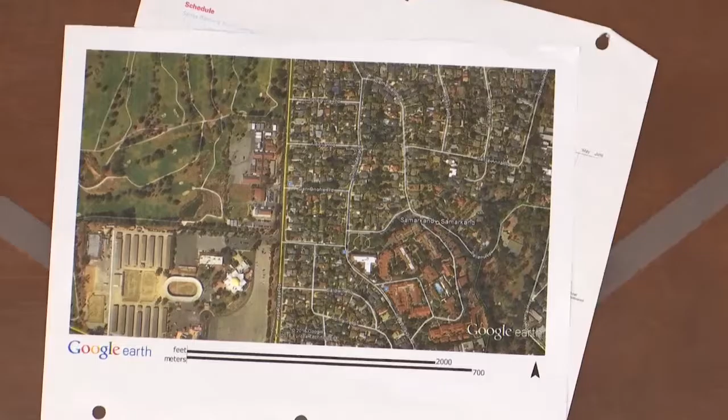A lot of them are just on dirt now. We've had a drought. But they're all parking within the setback, and they're up high. So the question becomes, what is going to be the tools in our toolkit if we're given the job to determine whether or not those folks will be allowed to park in their front yard, and how do we as a board have to deal with that? So that's maybe more of a process question.

Again, the issue with hedge height. The current hedge ordinance, as I understand it, if hedges want to be taller than 12 feet, remember they can go to 8 feet and they can get a 4-foot increase to the hedge from staff over the counter. But if they want to go higher than that, then there's another process that has to go through.

And the current ordinance, the way I understand it, the community development director had to make the call on that. The new NZO, the way I was reading the memo, seems to appear that that's going to come to us to make that decision. So one of my process questions is, does that start automatically a consent calendar? There's apparently something about public noticing. So we're just not quite sure how that all will work.

The accessory buildings, and this is some questions, again, of how it's really going to work. The new NZO says basically we're going to take what used to be allowed as a garage and an accessory building, we're going to combine those into the square footage, and now it can go up to 1,000 square feet on acre lots or larger. Some of us, I think, may have concern about that move, but again, we're not quite sure what that all means.

This chart that you're showing right now, that's just existing, and the bottom line is what you're proposing. Correct. Everything above the bottom line is just what's existing right now. Oh, well, no, not exactly. Sorry, that's what I'm mixing up. The part that's existing right now is these 6 boxes here. I don't think there's a way for me to draw a box around it, but...

Moving forward at 1 acre, it changes after the 1 acre designation. You can see these two underlines, that changes, but this part's the same. So the garages in the 1 and 3 acre, and the existing building in the 1 and 3 acre, are going up. Yeah, 'cause the whole total is gonna climb to 1,750 square feet - from 1,250 to 1,750 if you're more than 3 acres, from 1,250 to 1,500 if you're between 1 and 3 acres. So the garages and the accessory buildings will change.

Yeah, your mic might not be on. I don't know, maybe it's on mute. It's on now, okay, I can hear it.

So the garages and the accessory buildings will go up in the greater than 1 acre or greater than 3 acres. Correct, to 1,500 and 1,750 respectively. That's what's proposed, yes, and this was in response to a request from the public.

Can I ask one question, going back to the garage and livable space? So now the client has the opportunity to make that 1,000 square foot all garage if he wants to, correct? But he does have the option to have a maximum of 500 square feet of livable space and the rest garage, or he can make it all garage.

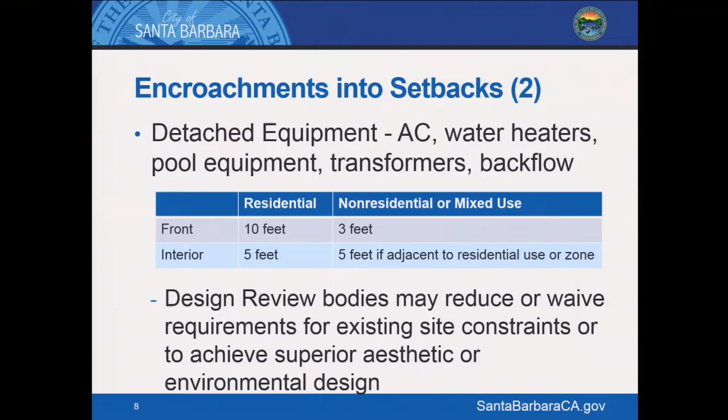So if the water heater was at least 5 feet away, it'd be allowed by right. But let's say for some reason the water heater itself would be 5 feet, but to put an enclosure around it would be 4 feet 6 inches away. But the design board wanted that because that's a superior aesthetic solution, then they could say okay, it could be 4 feet 6. But do we have the authority or decision-making process to say we don't want the water heater there, we want you to put it elsewhere?

Aesthetically, probably yes, from an aesthetic standpoint and neighborhood compatibility. We would expect that the design boards would use the good neighbor guidelines, and a water heater may not be the best thing to be right opposite a bedroom window. So then you could say we think this water heater should be put in a different spot along this wall. Okay, so that's a finding we'd have to be fairly definitive about—we're asking you not to put it there, asking you to put it somewhere else, and the reason is X, Y, and Z. Correct. Compatibility, neighborhood, good neighbor guidelines.

Next one, electric vehicle supply equipment. The city's trying to encourage electric vehicles. They need charging stations. Right now, a charging station that happens to be in a front setback needs a modification. We're saying that the new ordinance would allow these charging stations to be any place a parking lot's allowed, a legal parking space is allowed, but at least 10 feet from a front lot line, and that the design boards could let it be even closer if they wanted to.

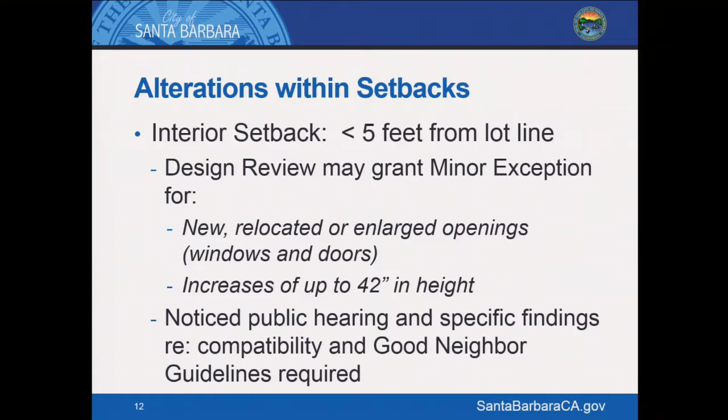I think that's where there would be a... we haven't thought through who looks at it yet. One of the things about this, we see it quite often, frustrated applicants asking why can't I put a door or window, and why do I have to go get a modification. So I think in that respect this starts to address a lot of that stuff we see, where we look at it and go, it looks just fine, we don't know why you have to get a modification.

So I think this is probably a huge help, particularly on those properties on the Mesa that were all built as tract houses in the 1960s, and then got overlaid with zoning changes that made every corner of their house non-compliant. So I think this is kind of a plus. And again, the findings are compatibility and good neighbor guidelines, the ones that say windows shouldn't face each other, that kind of thing.

Fences and hedges — so not in the too distant past, about 4 years or so, the city changed the fence and hedge height requirements. Basically, the council gave staff the authority to grant minor zoning exceptions allowing an additional 4 feet over what's allowed. So on interior fences and hedges, the requirement is 8-foot max, and with the minor zoning exception you can go up to 12 feet.

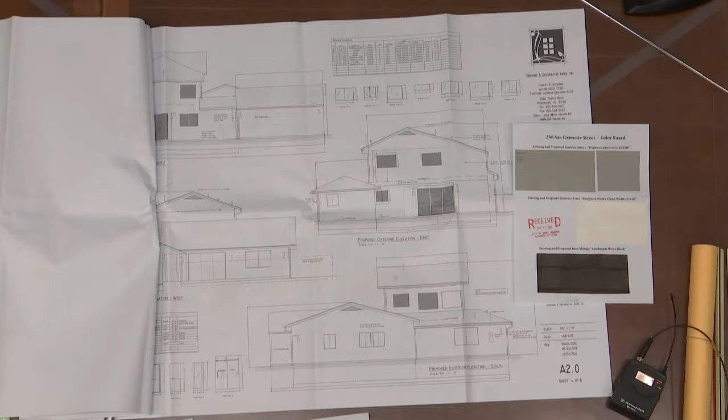Provide a photograph of the proposed roofing materials. That's also included on the color board. It's also the same as the existing roof.

The cut sheet for the light fixture you should have as well. There's only one exterior light, is that on the fixture drawings? It's on the last separate page. Oh, it is? Okay. Yeah, it is right here. Okay.

Provide an electrical plan, including exterior fixtures, and that should be somewhere on here. I'm not sure exactly where. It's shown on the elevations, which is primarily what we want to look at, okay?

And provide a roof plan, including the gutters and downspouts as well, which were all added. And then there were also architectural details. I don't know if that was on here, but eaves details are also on the last page. Okay, asked to include, and that's these. Okay, anything else?

The only other minor change we made that I feel I should point out is that the door out the back from the laundry room was changed from a door to a window. Okay, and that's on the first floor in the back of the house. Okay, anything else? That should be it.

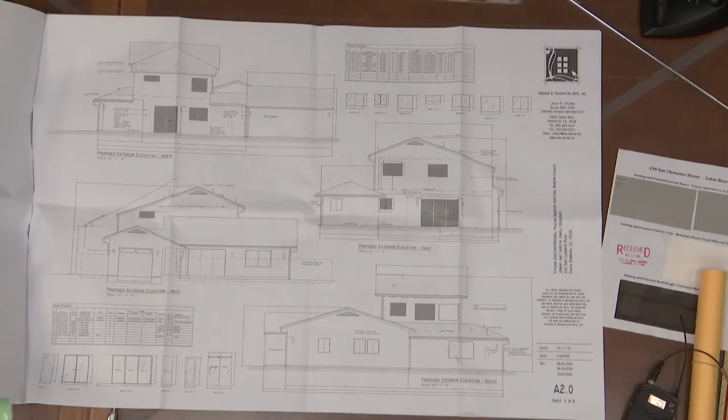Good. All right, before we go to questions from the board, do we have any public comment, any written comment, Katie? No, Mr. Chair. Anyone in the audience wishing to address this project? Seeing no one come forward, the chair will close public comment and bring it back to the board for questions.

The applicant's here for final approval. I have no questions, Mr. Chair. No questions. Anyone have comments? I think they did due diligence. I can support the project. Any other comments?

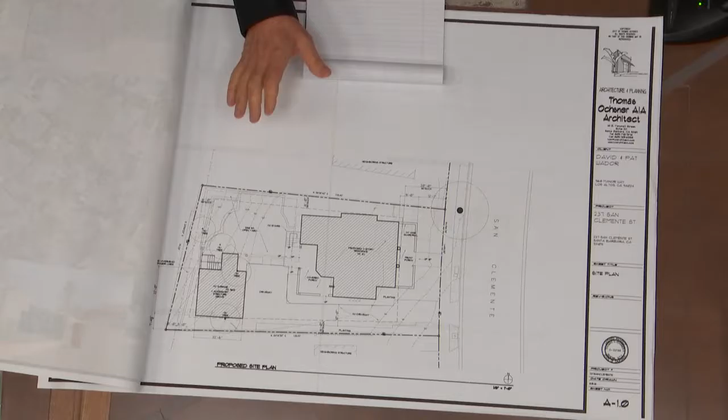...the required impervious material that would trigger Tier 3. So we're actually a Tier 2. Chuck can speak more to that.

In terms of the front porch, it has been brought in and the house has been brought a little bit back from the front. In addition, the porch has been dropped and the guardrail around it is only 2 feet high. I know this may fall into the category of what the discussion was about the front porch, but this is a complying porch - it sits low enough and doesn't have encroachments that would qualify it as a structure.

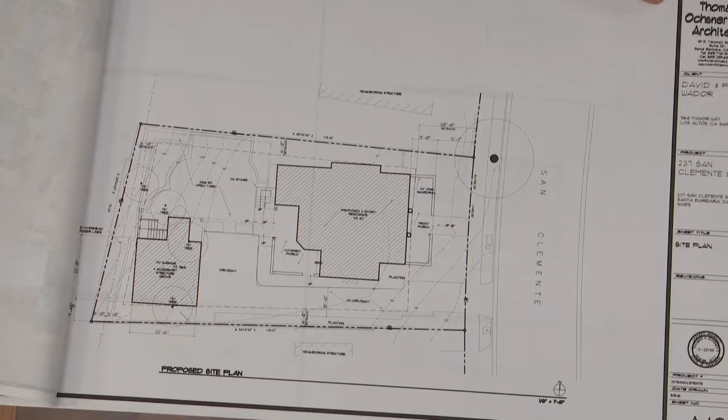In terms of grading, we've got some grading that will go over here in the rear. The rear spiral staircase has been turned into a conventional stairway. We can go over that in the elevations.

I did drop the accessory structure down slightly. I think the largest changes were, let's go to the upstairs. We reduced the second story deck, brought it in from the south so that it's more of a size that really conforms with the master. Again, we've got conventional stairs on the back of the house.

The square footage, we went and double-checked the FARs and the numbers. That's really a staff thing, and the FARs do add up to 85%. I'm happy to go over whatever misunderstanding there might be. Did that include the accessory structure? Yes, it does. So this is one of those accessory structures that combined is less than 1,000. The garage is 500, and the second story is much smaller than 500. That square footage went into the main house to get to the 85%.

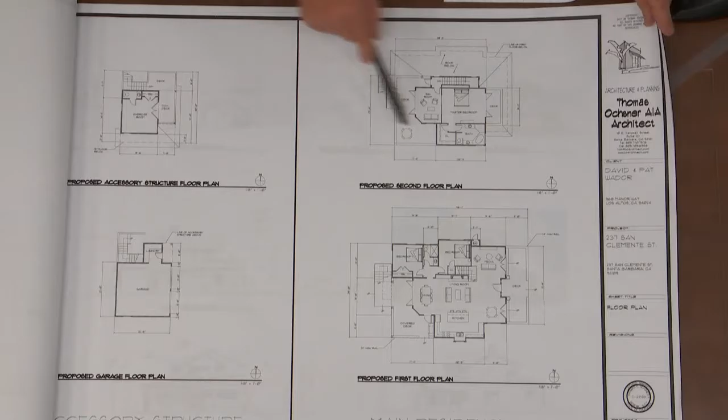So the second story was redesigned significantly on the accessory structure as well as the roof line over the master. And I've got the old elevations so we can compare them. It might be a little clearer.

But if we start with the front elevation, we brought the balcony in. It used to run all the way out to here. It's been brought in, and this hip's been introduced to create a little bit more symmetry. I think there was a comment about the size of the porch, the symmetry, and maybe how far the first floor porch was encroaching forward. But I think the board consolidated their comments to really reducing the second floor.

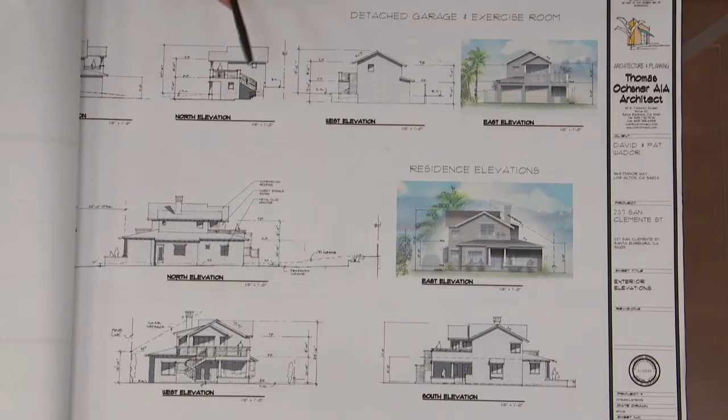The height of the structure went down slightly because of the redesign of the roof and because I set the building down lower and I set the accessory structure down lower, mainly to achieve both the reduction of height comment, but also to achieve a porch and finished floor that could flow out and still not be in violation of what is considered to be a structure out in the front yard. If you step up higher than 10 inches, it doesn't qualify as a patio in the front yard setback.

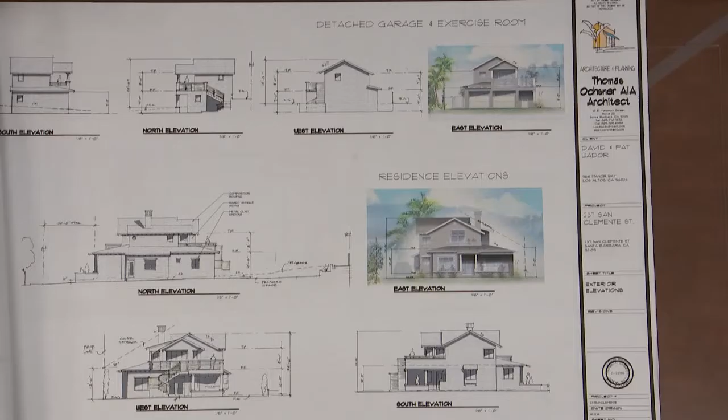So, let's see, there we go. In terms of the rear elevation, we've got the stairway, and a lot of the massing really stayed the same around the existing house. In terms of the accessory structure, the front was redesigned to create more of a simplified roof form. It might help if I pull out the previous elevations if we want, I can go over that. But again, the accessory structure has been lowered as well.

Let's see, what we're proposing to do now is, with the development of the landscape plan, we've got the rear yard slopes back to an easement area, and we're looking to pull out about 120 yards of earth to create a usable space that flows out off of the rear of the structure, and I know Chuck can speak more to that.

Do you want to use this one? Yeah, okay. I brought a set. Oh, is this with Laura? Okay, sure. Yeah, I thought we were at a different project, sure.

So we have the house here, of course, and then with the garage in back, we've got to get a driveway back. So these are pavers contained with concrete. There you go, and it's got a concrete grade beam to contain these squares of pavers. And then we've got, it's very simple, a seat wall here. So this is, if this is +0, this is +18, and this is about +6, as this section shows. So there's the seat wall.

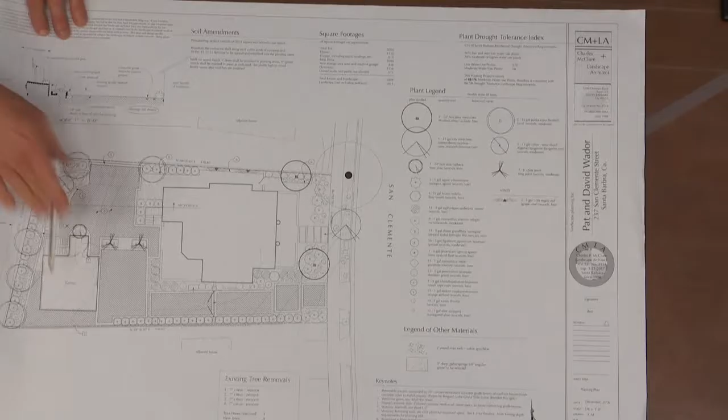It's new or replaced, 500 square feet of new or replaced impervious surface. We're proposing a new 753 square foot garage, right? It's not a net increase of 500. It's new though, right? Well, but there's existing, if you look at the existing coverage of the site. Okay, I'll just double check later.

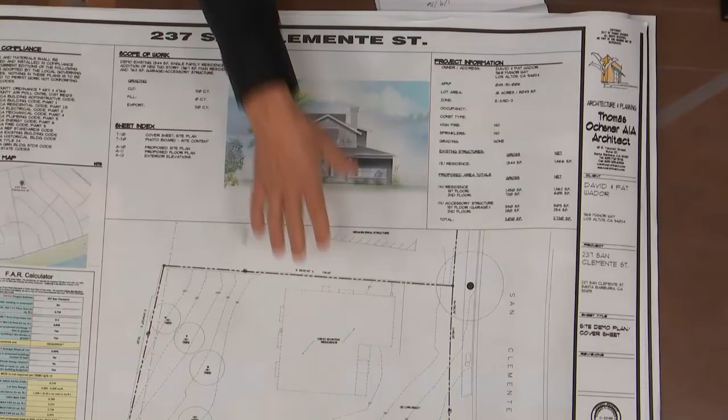The net gain is not in excess of 500 square feet. This is the existing structure, and there's an existing driveway. So if you look at the proposed footprint, it's almost the same. Plus, we're eliminating the existing driveway, which is impervious. So we're adding a footprint of a building that's about, I'll check, but I don't know that it's going to count because it's replaced either way, but I'll double check. We'll take a look at that. Anything else?

Okay, before we go to questions for the board, did you get any communication? Anyone in the audience wishing to address this project? Seeing no one come forward, the chair closed public comment. Back to the board for questions. Who has questions?

Any questions? This is about the accessory building. So underneath is a two-car garage, which we have a picture of, and it says the size of that is 280 square feet. Is that correct? That sounds like that's the second floor, yeah. Right, that's the second floor.

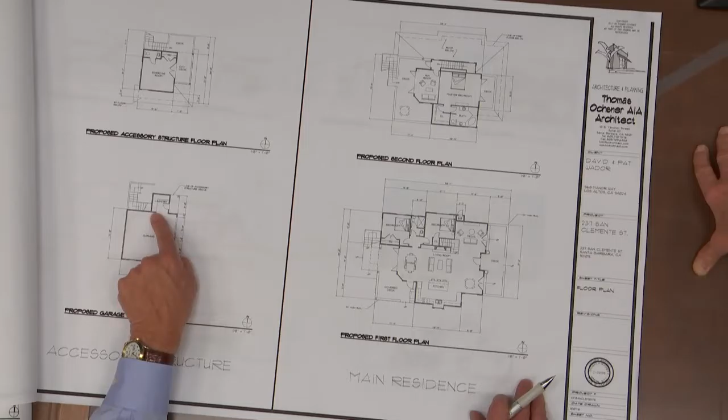It looks to me like it looks a lot bigger than that with the deck. Let's go to the floor plan. So it has a two-car garage and then it has a little laundry room, so that makes the first floor bigger than the average garage because it's got this little laundry room. The garage is what's required by the building code, correct? Yeah, so by city building code, the two-car garage would have to be that big. Only about 20 feet minimum.

Minimum, yeah, so this is the laundry room for that garage. Okay, and I think we talked about how the cars go in and then back out? Right, it's about 20 feet is what you want, so they back out.

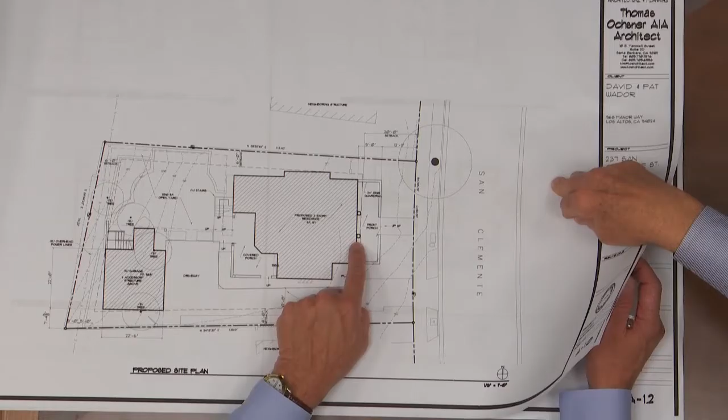Mr. Chair, just one more question about the accessory building. I want to know, are there two exterior staircases, or does this have an internal one? No, there's no internal access, there's only exterior. So there's a staircase there and another staircase to the house? On the main house, right, so there's two staircases outside in the back.

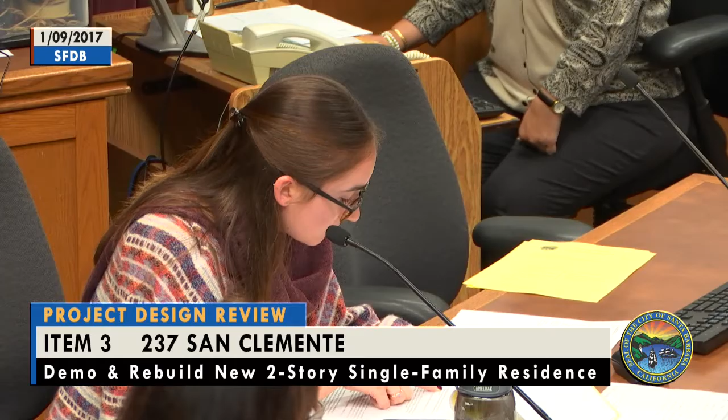I was looking at Michelle's plan set comments, and one was that you had to relocate or remove the closet within the detached accessory building. The closet will not be located adjacent to the half bath because it has the potential to become more than a half bath. I would tend to say that the configuration of the bathroom - we're talking about this closet right here. Yes. So if you remove that from the plan, you've satisfied it - relocate it from there. But that's internal to the plan and probably not subject to aesthetic review.

She also wanted you to dimension that out to say it was no larger than 3 by 7 - the maximum size of the bathroom. So those are technical details - there is a half bath up there. Any other comments?

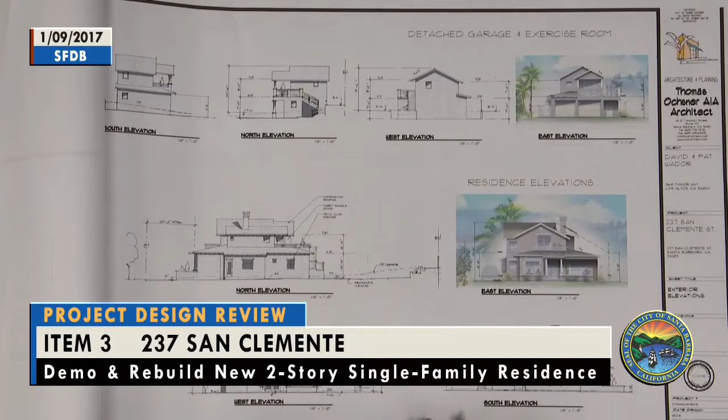I think the applicant has addressed all of our requests. They reduced the front balcony. I went out to that street and that neighborhood - we've had several projects there, including the one we just looked at. I spent time walking around, and in this case the owner happened to be present and invited me to walk into the site and his backyard. So from the get-go I have a fairly good understanding of the site. I'm not overly concerned about the accessory building and the room on top.

And yes, could it be made into a unit? We see this stuff all the time, and people are going to rent it out. But you can only do so much. I don't think it's overly concerning from a size, scale, and bulk perspective - the size is not outlandish, the scale is appropriate, and the bulk is pushed to the center.

Sometimes the big challenge, even from the back, is quality. The neighbor to the west is higher, on a higher lot, stepping up the hill on that side. I do like the reconfiguration of this balcony. One challenge on that street is we've got a couple of houses to either side and across the street that are two stories.

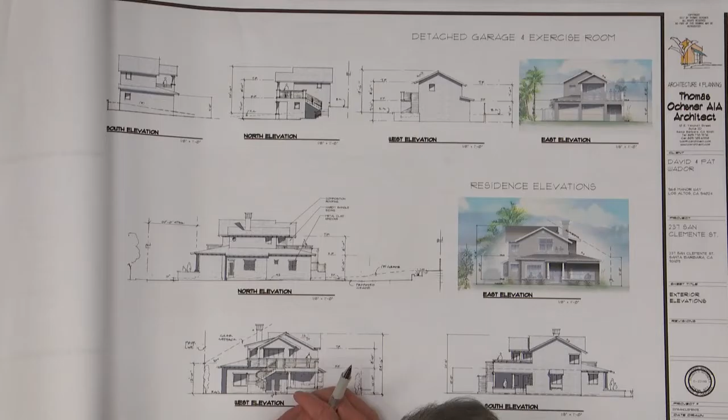It's relatively small. I'm not overly concerned about the deck on the backside since it faces the backyard and is a considerable distance from the back property line. We also requested the applicant reconsider the spiral staircase because we felt it wasn't appropriate to the architecture being presented, so they've done that. I think that's appropriate, and it does reflect in the little staircase that takes you up to the room over the garage. So I'm comfortable that all those things have been addressed.

I do have one question that just dawned on me, down here. So your top of porch, so to speak, is right here.

So that alleviates you from the code issue of dropping off more than 18 inches? Ten inches is the height, so that's the maximum, right? So the drop-off thing goes away in terms of the building code, because you're less than 18 inches. It would be an allowed encroachment in the front yard if that deck is 10 inches or less.

And I agree with my colleague about the color of gray being fairly important. There are some really nice grays out there, and I hope you keep it to the warm side. I think those are my comments.

Okay, any further comments? If not, the chair would entertain a motion. The applicant is requesting project design approval. I'll make a motion. Wait, did we know what the roof material was? We talked about that last time. It's composition roof. And you'll be coming back with a color board when you return.

I'd like the board to give this project design approval, to return to us. You can decide either full board or consent calendar, with the following comments. But first, I'd like to say why we are approving the project: we appreciate that you have responded to our request to drop the design, which we felt was more compatible with the neighborhood. And when you do come back, we'd like to see your color board with the gray.

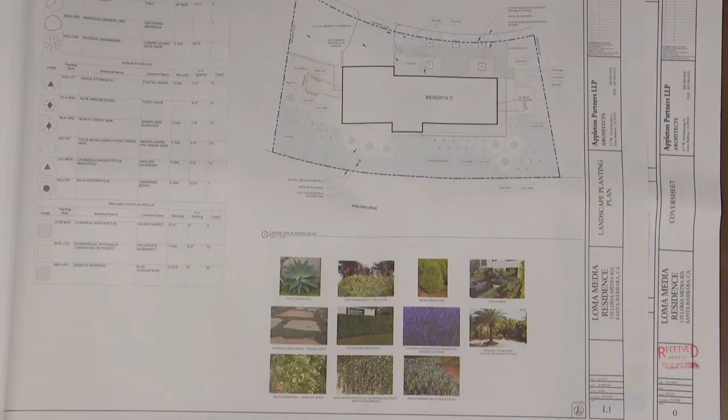Would you like this exhibit as well? Okay. So basically, you want to start with the front yard where we've removed the paving going into the entry? Yes. Are your mics on? There you go. All right.

The existing front yard is just a slab of concrete paving. So we're going to break that up and do kind of a gravel garden, a formal hedge garden with citrus trees. We're going to use some ficus for hedging along the street, maintain it at about 5 feet, have a garden gate at the front, just real simple and clean looking.

And then for the hillside on the other side, the back side of the house, this is a view down at the street below. You can see in the renderings what we're doing is a lot of landscaping to soften that elevation.

We want to use Magnolia grandiflora in the open spot right here as a screen. The clients wanted to have just kind of succulent landscape going down, but we've also used lemonade berry to give us a little bit of variety and height.

Anything else you want to point out on landscaping, or should we move on to the windows? We can move on. Okay, so if we move to the exterior elevations.

So this is the existing residence. We're not increasing the footprint. What we're doing is making improvements to the existing structure, and we're changing materials. We are going to replace the windows, putting in dual pane glazing and adding some more detail to the exteriors.

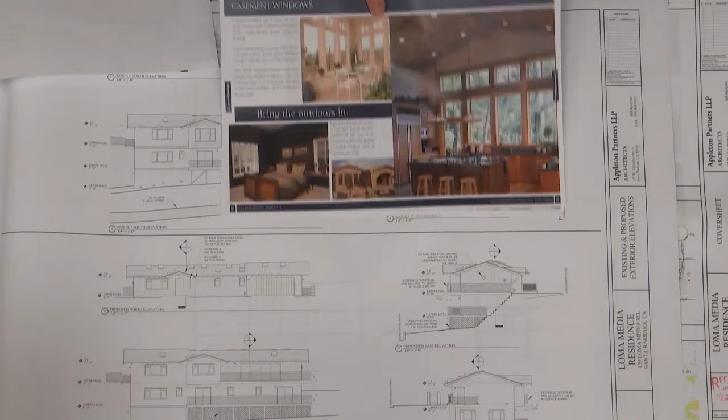We're using Sierra Pacific windows. This is the window system. It was requested that we bring in an exhibit showing the style of the windows that we're proposing.

Okay. We also went ahead and did a couple of renderings of the elevations showing what the landscape is also going to do to soften this. I think that rear elevation photo got folded into the set—about adding the lattice, there it is. Yeah, we're also going to add lattice around the structure for the deck here.

And then adding the board and batten. Right, and the board and batten starts at a certain degree on the front, and we're going to extend that around the side and continue it to this bay back here, as well as on the bottom, to help break up the rear facade.

Are these skylights or what? Yes, those are existing, not new. Are these new? They're all four existing? Yes, all of them are existing. They were put in by the previous owner without permits, so it's part of the ZIR. No, exactly. Okay, anything else that you present?

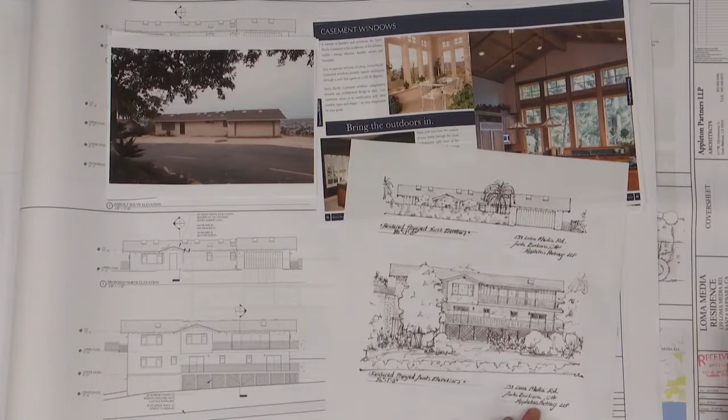No, that's everything that we had covered last time. All right, thank you.

Before we go to questions of the board and comments, is there anyone in the audience wishing to address this project? Katie, did we get any written communication? No, Mr. Chair. Seeing no one come forward, The chair will close public comment and bring it back to the board for questions.

Who has questions? I do. To Jeff, have you used that ficus a lot? Yeah, yeah. What does green gem top out at as far as height? It can grow really high. Yeah, it's a tree, Microcarpa, but we're going to keep it clean and short at about 5 feet. I guess the big concern with any ficus is the invasive root system. It's a plant that's on my do-not-use list for that reason alone.

They do have it, it's like the Moreton Bay fig tree basically, you know. Yeah, it is. It'll climb right out of the ground eventually. It's a concrete jungle over there, so it'll be contained, in a planter, a concrete planter. Well, that's better, then it probably won't go anywhere, huh?

But it might create a maintenance problem. It's gonna lift the concrete, grow fast, you'll have to be hedging it once a month. Yeah, they're known to lift concrete. I've had a lot of it removed on jobs because of the invasive roots. Ficus roots will break through concrete or the center of the earth -- they ate Angkor Wat, you know?

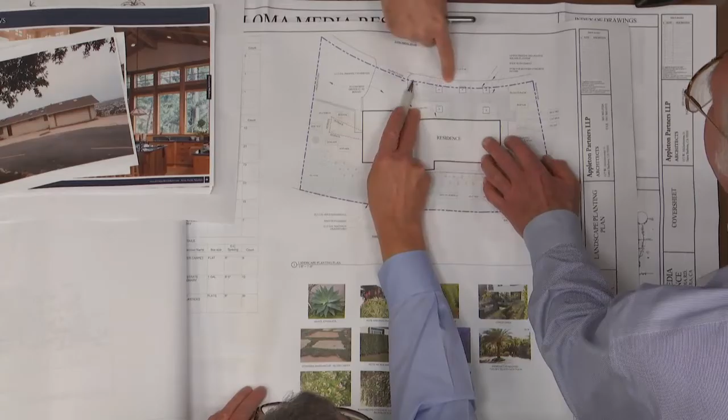It's just a garden gate right here, off the driveway. So it's just two pallets, a little arbor, and then it's hedge. Is that hedge, where's -- yeah, that's hedge. These are hedge elements, yes, correct, right out into the, I mean there is a...

Yeah, I think you're gonna have to have this reviewed by transportation, because I'm almost certain you can't put that into the right of way. You'll have to -- there's an existing road line there. Well, it's not even a road line, there is -- I mean all the way, both sides of that street, there's a swale, thank you.

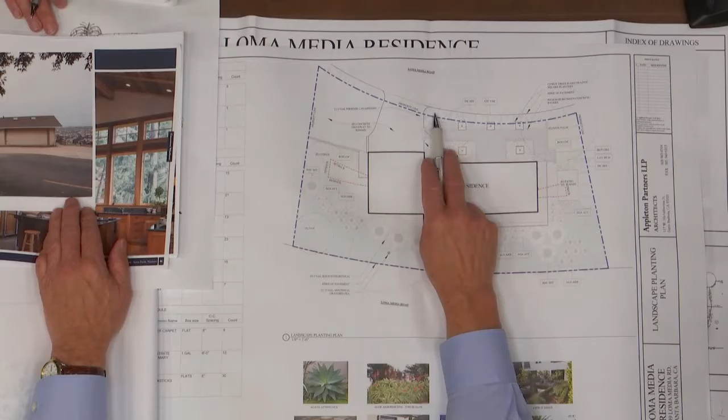Yeah, there's a swale on both sides. This particular one, they've kind of extended the road right into the drive. Exactly, but the point is you need to have transportation review this. Yes, because it's been our experience they will not allow you to plant anything there -- that is your property line, isn't it? And the road right of way. That hedge will have to be back of this line, so it'll have to be set back.

Well, yeah, that remains to be seen. The other part of the question is, if you do have that hedge, you're limited to the height, particularly in the triangle right here. Under the new hedge ordinance, as I understand it, you're allowed this hedge to go to 8 feet if you want, but you do need to maintain the safety triangle. Right.

This probably all needs to be reviewed by Transportation and Public Works. The tree is probably... is that an existing tree?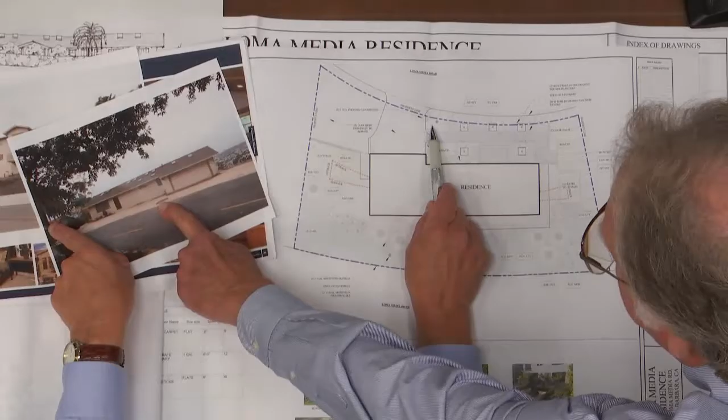Correct, it's not there yet. So you may be looking at this tree, that's existing, and this is the new one in the view. So that's an existing tree, not the roof entry canopy. You probably really need to think about where that gets planted.

So, other questions? Courtney, did you have questions? I did—is the fireplace, is there no chimney? That was taken off.

I'll just ask, what is the roof entry canopy? Oh, it's over this front door here. Actually if you look, you can see it in this rendering right here. Okay, I understand, thank you. That's sitting out beyond the house, it's cantilevered off of the existing roof, so we can show you in the roof plan.

And the elevation right there. Yeah, this is it, right there. It's got a kicker brace, so it's sitting out this far. Well, it's proposed, it's down there.

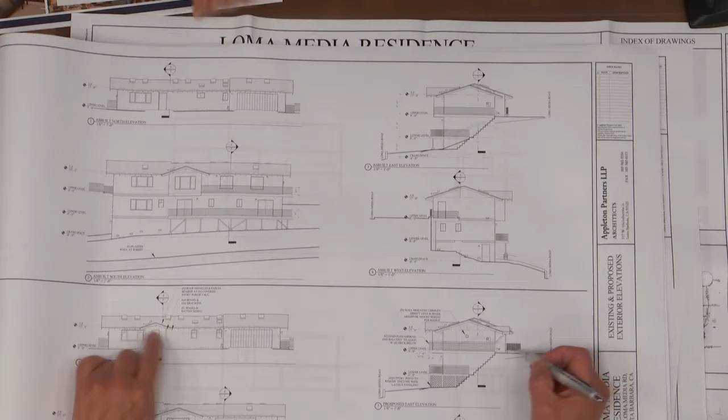That's existing. This appears to be kickers, but it doesn't show in this elevation. Probably isn't—well, that's the one you're saying. Yeah, those two, it's a kicker brace there, probably the lower one. Let me see the existing, right there. Oh yeah, this one's right here. There's nothing there now. In other words, you've got nothing there now, and you're adding everything.

Yeah, it's just a little California frame there. Oh, it's actually back here, this one. Yeah, there it is. This right here is what we're adding. So you're adding just a roof. Just a roof, and a little kicker that holds out the front door, over that.

You're adding—I guess that's the plane of the front of the house right there. No, there's two things going on. That garage plane is out in front of this one. Oh yes, right, okay, sorry. So that's the garage plane, this is back. I don't quite understand that, but more or less you've got the roof overhang on this side, and then this comes and frames off of that.

Are we allowed to come... I mean, if that's the setback for the house right there, which is the garage, are they allowed to? They have to go through a modification for that, and that was one of my questions.

Go back to the site plan. It's all in the front yard setback. See, this is one of the things—when they did that overlay we keep talking about in 1975, they made this lot basically not buildable. Oh, because the setback is 30 feet, yeah. There's a street here and a street here, so the zoning is 30 feet back, which puts the whole house...

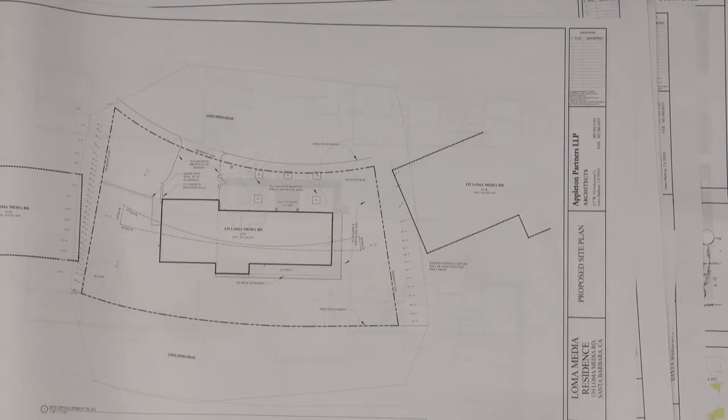...virtually the whole house, including changing the windows, in the setback. So they have to get a modification for those, here and here. That's a result of that zoning overlay. Yeah, so I have one question real quick.

You said 'consider an alternative to the proposed long balcony that dominates the view, study the reconfigure to break it up,' but I don't see any proposed long balcony. Well, what we did is expand the balcony above to give them more space up there. We enclosed the lattice, and we thought that in 3 dimensions, by enclosing that, it would start breaking up that elevation, because right now it looks very flat.

So one of my questions, on the lattice—this looks like a very large lattice. What are you anticipating this material to be? Because you're in a high fire district, and generally these have to be 1 hour rated. Yeah, it'll probably end up being Hardie board on the back, and then the lattice applied over the top of it, like 1 by, or not even 1 by, more like slats. So you wouldn't see through the lattice? No.

Based on what you just described, that isn't what's shown here, because you can see through it. Well, we haven't gone to the fire department yet, but I would guess that once we start putting that on there, we'll probably have to make that one hour rating, which would be better anyway, and then we'll probably have to enclose it.

But the idea is to get some lattice to give it some solidity, to give the elevation less of, you know, 4x4 sticks hanging off on the end. Any comments or questions? If the fire department is fine with open lattice, but I don't think they will be, it'll be nicer to enclose it.

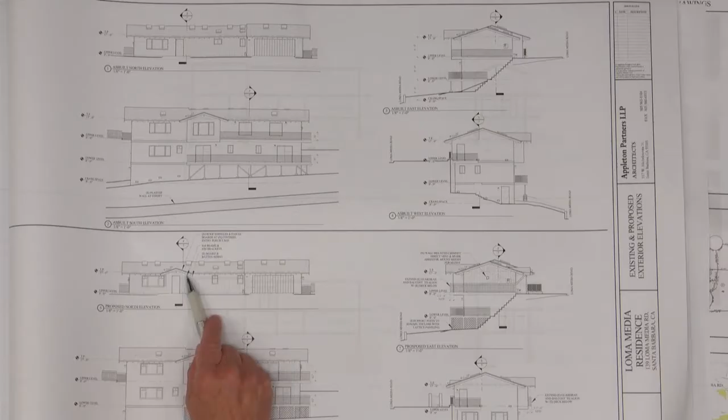I think that the front door and the composition of this may need a little work just in terms of proportion. This looks kind of a lot bigger than its relationship to the proportion of the door. If you look at traditional craftsman approaches, this front door would have been much larger, or that overhang would have been smaller, because you've got this jammed up right against the window, so you might want to look at that.

That's the issue I brought up earlier in the NZO discussion - all these homes have to count this basement space even if they're not using it, because of how the city zoning report defines basement, which is that whole 4-foot perimeter around the edge regardless of the fact you have a slope. The filmmaker who lived there had all his film stored under it.

So was it habitable space down there? No, it was just storage - stuff thrown in there. It's gone now since he passed away. Okay, any other comments?

I won't even call it habitable, I'll call it headroom space down there - it's just a concrete room. We have this condition all over the Riviera, and yet they have to count all that toward the FAR.

Okay, if there are no further comments, they need to proceed to the staff hearing officer of the zoning. Typically, if we want to encourage them to do that, we make a motion with comments about the aesthetic elements that have to be considered in the modification. As I understand it, they have to get a modification for this and a modification for that - there was a bit of a gray zone, because when we started, just changing the windows was exempt, but now they're doing all this other stuff.

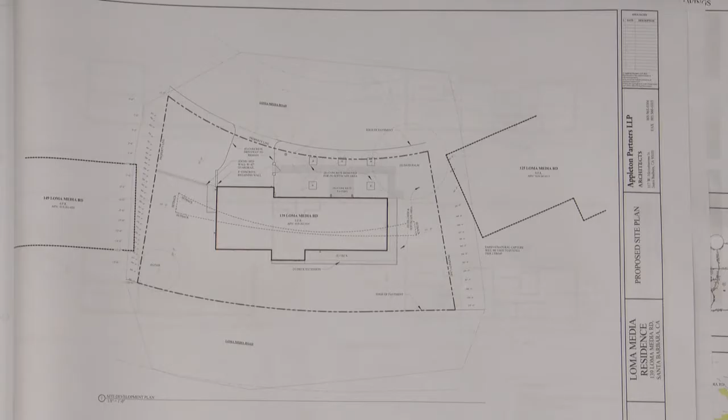If you're encouraging them to proceed to the staff hearing officer, then they're going to want to look for supportive comments for the aesthetics of the modification.

So the chair would look for a motion. Mr. Chair, I'll make a motion, but could you remind me what the two modifications needed are? A modification front and back, because they have a street down here and a street up here, so it puts 30 feet - since they're on front streets, zoning requires 30 feet in the front and 30 feet in the back. This little element is the only place where, if this was a brand-new lot, they could actually build something without a modification.

Just for clarification, there are two front setback modifications - two front, yes - and a possible open yard modification as well.

Oh, is it? Okay, so for the 1,250 square feet, there's an open yard modification - so if you want to look at the landscape plan, based on what I see, they haven't identified any 1,250 square feet. So you're going to need a mod for that - there's not enough room for it.

So again, from a landscape standpoint, if we're willing to give this a positive review, the staff hearing officer is going to need to hear from us about whether or not we're comfortable if they don't provide the 1,250 square feet, because if they did, they'd have to provide it in the setbacks on a relatively level site, which they don't have.

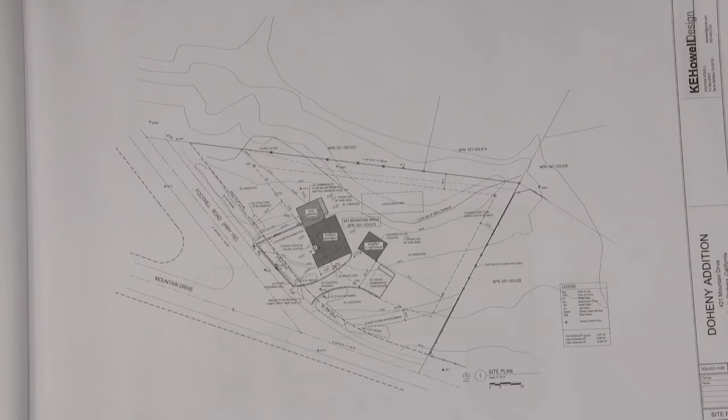To get you a little familiar with it, this is the existing residence on the corner of Foothill Road and Mountain Drive. At the main level, it's a 2-bedroom, 1-bathroom, and what we're proposing is to extend the main level to the north, adding a master bedroom, master bathroom, and circulation to the lower level. At the lower level, we're proposing an additional bedroom, bathroom, and laundry room, as well as access to the lower level crawl space/basement of the existing residence.

Show you A 2.1. This is the existing lower level crawl space/basement with roughly 6 feet of head clearance. What we propose is for this lower level to be built into the ground a few feet, but given the existing topography, it would still allow for a walkout at the bedroom.

And then circulation would continue upstairs to the main level on sheet A 2.2, which goes up to the master bedroom, master bath, closet, and circulation to the existing house.

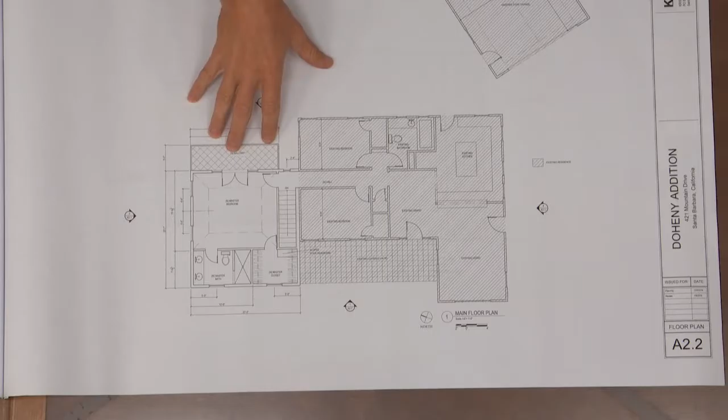The approach to the proposed part is by splitting a hallway through the 2 existing bedrooms in the main residence. And that is basically what we're proposing.

On A 3.1, you can see the elevations, which keep the character of the existing residence but provide additional needed square footage for the family. Okay, anything else? That's it.

Okay, thank you. Before questions and answers, is there anyone in the public wishing to address this project? Katie, did we receive any correspondence? No, Mr. Chair. Thank you. Chair will then close public comment, seeing no one come forward, and bring it back to the board for questions and answers, or questions and comments.

Questions? Yeah, I have a question real quick, just a clarification. What's going on right here with the roofs? Looks kind of strange. This is set back from the existing house.

So those tiles actually come out a little bit, right? This one kind of out. It's coming toward you, correct. This is back, like that, kind of like that. No, the roof plan actually kind of clears that up. So this is all back here, so it doesn't overhang. This is sitting forward of that wall.

Okay, might want to erase mine. Sorry about that. Got it, I got it. Other questions? No, this just depicts existing, the dashed line. Yeah, it's all the barrel tile.

Photographs of the existing house. Okay, other questions?

How close is it, there's a creek that runs through? Is it a drainage that comes all the way down the mountain and runs through there? Okay, and which is right, this is the flow line of that there. Yeah.

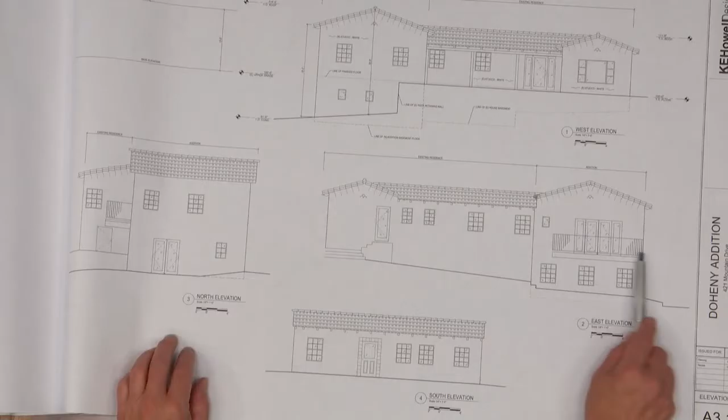So this set of doors opens onto grade, correct? Down here? Correct. And so that looks like, oops, that's this set of doors. Yes, that's the set of doors that's walking onto this little balcony, correct. And that balcony looks to be 5 feet across the back.

All right, other questions? Yes, Mr. Chair. In the back of the house, is there a view? What do you see? No, it goes uphill and it's pretty heavily wooded in the back. Up the hill, you're looking at a grove of oak trees and stuff? It goes down and up and then really up, which is opposite this.

Okay, I'm sorry, this side of the house, what is this side of the house facing? It faces east. Yeah, what's it facing to? Faces right into, so on the site plan the ground starts up here. Got it, it's climbing up this way. Thank you.

I've driven by there 2 billion times, and I never looked at the house, because it's behind all those hedges and trees right there on the corner. Okay, other questions?

Okay, let's go to comments. And we can take any action we'd like today. If we felt it was appropriate, we can give a project design approval, or we can just give comments, et cetera. Yeah, Mr. Chair,

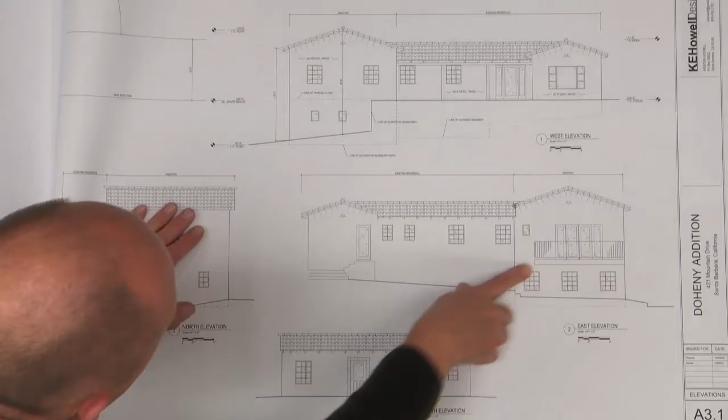because of the location of the house, the reason I asked is there's a little, you could develop the elevation a little bit more, but I don't know if it matters because no one sees it. But I was looking at this, it'd be kind of possible to pull the balcony across and have brackets, but that's a cost issue and it's in back of the house, so I don't know if it's an issue. You're missing a railing. I'd kind of like to see the railings.

And the front door, is this the front door? Yes. You know, that's kind of, where's the picture? Where's the picture? That's all existing. Let's see the existing. Oh, okay. Wait a minute, we never get them down here. I'm confused. So this is the, this is the back? Yeah, and then that's the patio.

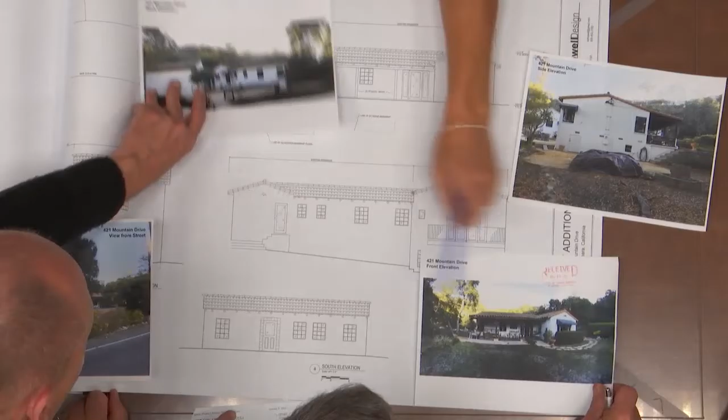Well, this is the front. Well, this is the street side. What elevation is this, this one? That window, is that window on this side, correct? Correct. And that set of doors is that. So where is this? Do we have a photograph? We don't have a photo of that. Which side of the house is that? That is the driveway side.

Let's go back to this. Oh, it's this side here. So that is this side right here, this side over here. So that's all existing? That side from the front street, that's the front door, that's what's considered the front door. That's this photograph here. We don't have a picture of that side. I think it would be helpful when you come back to make sure you get us a picture of that side, please. Okay.

Comments? One of the reasons why this balcony doesn't extend all the way is there's a bedroom window right there that looks into there.

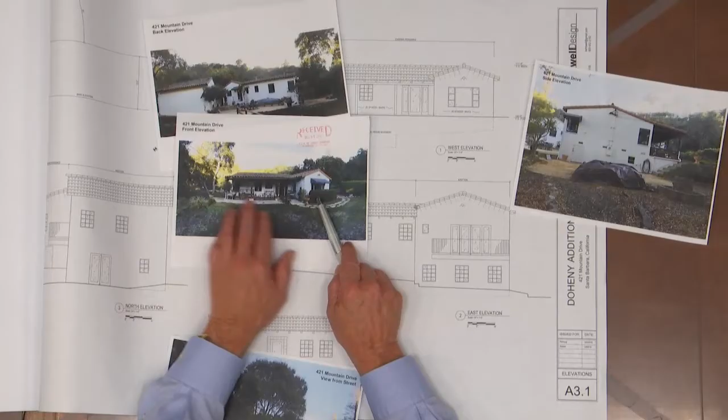Yeah, I think what you're trying to do is probably okay, but it's not there. And the reason is, you have this wonderful scaled little casita, a little Spanish cottage with a great front porch, and you're going to add to this on this end. And this whole piece is not in proportion to what you're doing. I think that this whole element has to come down. The relationship between the top of that window and this is really important, and I think you're doing a disservice to your whole composition. You have a wonderful little house here, and you can see it from the road, because I see it every Saturday morning. And I think that you need to rethink how that roof works.

It may be that what you really want to do is not let the roof plane engage that way, but let it engage opposite of what you're doing. Right now you've got a simple little roof like this. I think you might want to take this roof element and let it engage below it rather than above it. That's your geometry challenge, because you're trying to introduce this roof and get an elevation profile with this nice little porch out here, allowing it to engage down here.

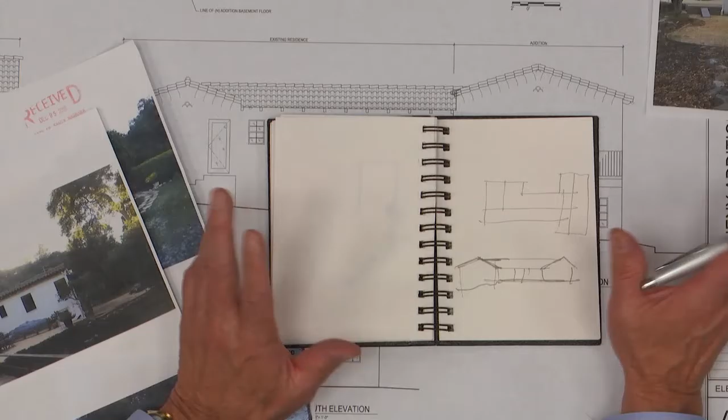Then you've got a nice composition, and much more, because you're not trying to impose a contemporary design on this. You're engaging the traditional design, and I think that's how one would want to see it, so that the windows really have a proportional relationship to that.

You're right here, because this is nice here. Yeah, but really that is not. So you kind of need to capture what's going on there. It's just the geometry of how this roof is attached to that roof, and I think you just need to lower it.

Is it that high because you have a vaulted ceiling in there? It's a vaulted ceiling in there. Well, I think you can even still get the vaulted ceiling, but drop it down. You're still going to have a wonderful vaulted ceiling inside.

If you look at some of the great Spanish homes that we all kind of look to in Santa Barbara, even some of the smaller ones have really wonderful vaulted ceilings, and they're not that high. They look really cool because you're going to vault that up. So I think you need to drop that down, and then the composition will kind of come together.

Have you brought that addition right there all the way out to the front of the porch? Yeah, that's due to some reason, that's okay, that still works. But you have a dead space right there in the hallway.

You could put a door right there. Oh, but they've got a closet there. They could put a little window right there into the staircase. That would look very hacienda, very Spanish.

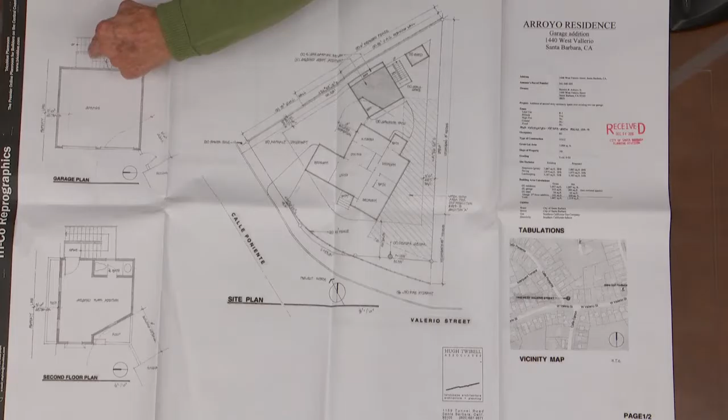You can see the floor plan here is the garage with the stairs going up, and the second floor with the setback. These two sections would just be roof.

The existing photos, you've probably seen - these are some close-ups they asked me to bring. This is the existing front of the house, which has gable tile roofs, but the back of the house is Pueblo style, so it's a mix of roof lines.

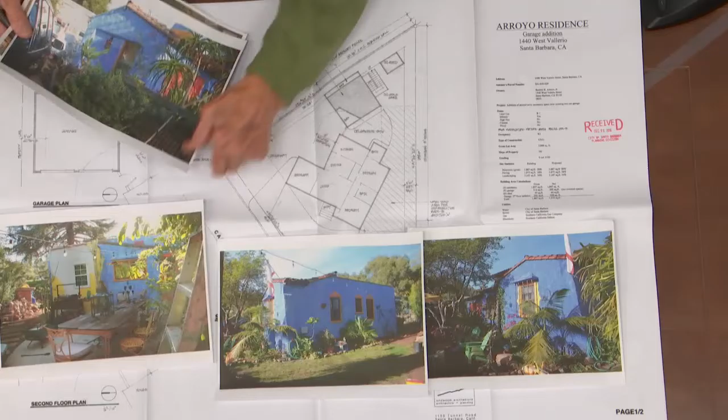This would be this end of the house here, the east end. This is the back of the house, and this would be the west end. You can see the gables here, a partial gable here, and a gable here, but on the back it's all Pueblo style.

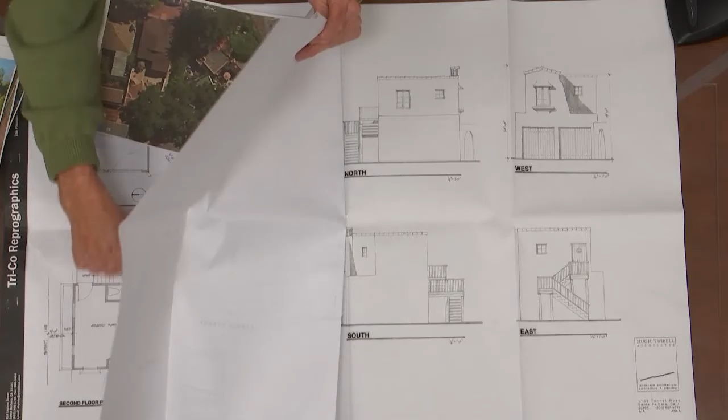So in designing the structure, I tried to take this element in the front, which is a gable with a little buttress on the front. The window trims are projected out, and I tried to mimic that because we're trying to accentuate this part and do it all in Pueblo style. So we mimic it here with a little buttress, pop the windows out with the trim, and the rest of the building is just Pueblo style.

We have a minimum amount of windows. This is the back of the building, this is the side facing the yard, this is the side facing the neighbor, and this is the side facing the front. We've got our solar access - there's an existing 4-foot retaining wall here, so we meet solar access requirements. We have 8-foot ceilings with a foot between and the parapet on top.

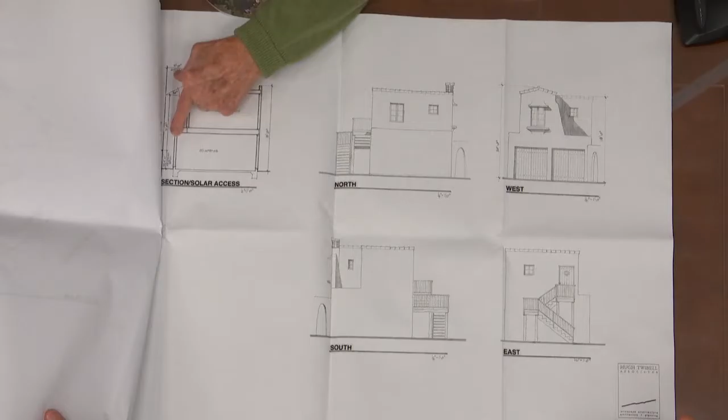So that's basically it, it's pretty straightforward. It's a 5-foot setback, and this is currently 2.5, so we have to set this back an additional 2.5 feet. Because of this situation, we require a technical modification, and that's why we're here for comments from your board.

So that's the modification for staff hearing officer. Anything else? No, I think that's it. Materials and colors probably match existing.

One thing I might add is that the existing structure has a roof that slopes this direction. Above these doors are 2 windows, and the roof above the plate height here is about 4 feet - that's what we're seeing here. It could be 6 feet. So from the front, it's not going to appear that much taller than it was.

It's kind of odd, so that's the side elevation we're seeing? Right. And inside it's just open beam, there's nothing up here. These windows were just sort of like clerestory windows. This is the back end.

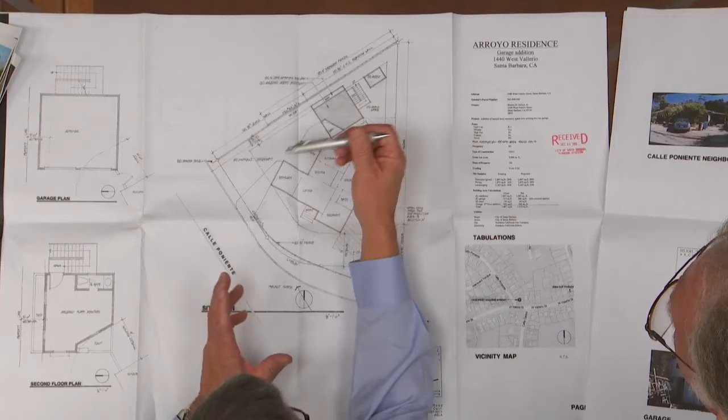But anyway, what would be important is to know where that tree is, because what I was trying to figure out - Ms. Hill's letter alludes to the fact that this second floor is going to look into the bedroom. But it was so vegetated over there I couldn't see where that was on this property, couldn't see where that window is. There also appears to be a shed or something right up against the property line back there somewhere - I couldn't tell if it's up the hill or down here. So knowing where that tree is and what you can see or can't see via the tree, since it's on the other property, will probably be a pretty important part of the conversation.

Other questions? Is that an aerial photograph that shows the tree you have there? Can we see it? Can we put it up on the camera? Can I respond to that, Fred? The tree is up in this area up here, the base of the trunk, and it grows out this way.

The house is about right in here. And the neighbor has a carport that comes all the way to the property line. I saw that. So the bedroom is by that shed you saw back here - the shading of that bedroom mentioned in the letter is caused by this carport roof, which goes all the way back to that bedroom, rather than the tree. And I think the bedroom is actually right in this area. Okay, here.

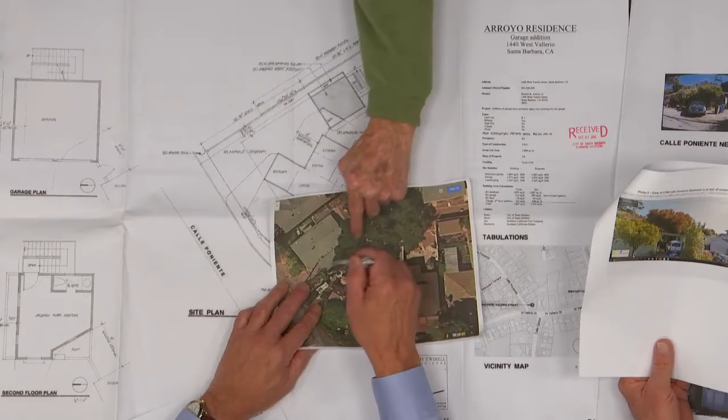That would be helpful to have on a drawing so we understand it. I had a drawing showing where this house is, and there's another house here. This is the oak tree we're talking about - you're saying the trunk is probably back here somewhere. I think it's right in here, and this is another oak tree back in here. This house has some kind of configuration under that tree.

Here's looking up at the tree, and here's the house. Here's the carport, which comes back about here, and then here's the carport right here, near the bedroom. I think that'll be helpful to figure this out. This carport belongs to this house here.

So you want me to locate the tree and approximate the drip line, more or less, so we could see where things are - the windows or whatever - so we can understand what's going on there. That would be most helpful.

This right here is the existing garage. On the front of the garage, the white - yeah, that's this guy. The branch I was looking at was this branch right here. I don't know if that's the same tree. Because this roof comes back here, I don't think it would be another tree - I think it's right there.

All right, so show the oak tree and just kind of generally what's going on here. And also, if you can describe at some point how much pruning you might have to do to get your floor up there, just so we can see from an aesthetic standpoint and a location standpoint. The legal issues we'll leave to the staff side.

The legal issues I've run into in the past - I've had clients I represented where the neighbor trimmed the tree. Apparently you can trim right to the property line. That's what I understand, but we'll let staff deal with that - staff's not going to comment on it. It's a civil matter between the two, so it's not under our purview - we'll take it out of our discussion.

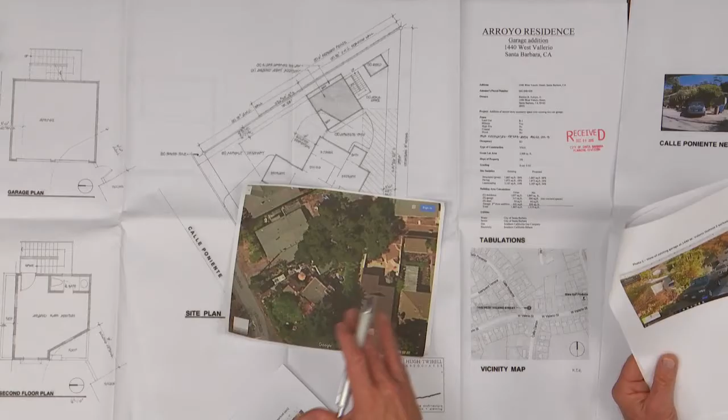The overhead power line - as I understand it, my experience has been if you go over a certain amount of construction cost, the city will make you underground it. If you're not over that, you can leave it up in the air wherever it is. I think they come from here now, and he looked into undergrounding - they come across this way to here, and it was just too expensive. So unless that threshold is triggered, you probably don't have to do anything other than just reconnect it.

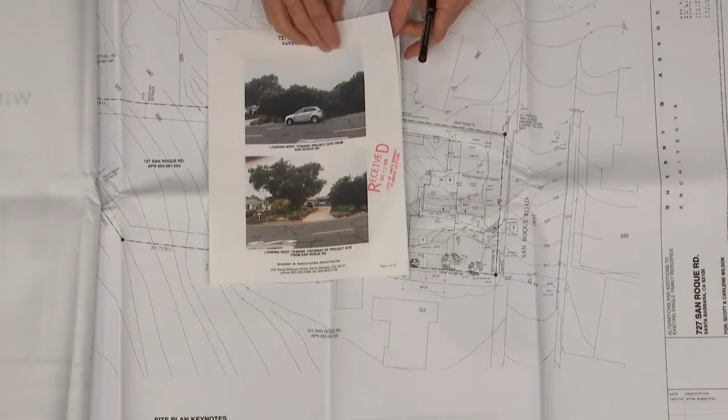So what we're doing is... do you have the photos? It's right on San Roque, right before you get to Foothill. So it's on, if you're going up San Roque, it's on the left.

Right before the corner, and in the front is a large hedge. You can't see much of the property until you get to it, and then you look through the hedges and the trees and you can see the lower level carport and part of the house. It's not very visible from the street.

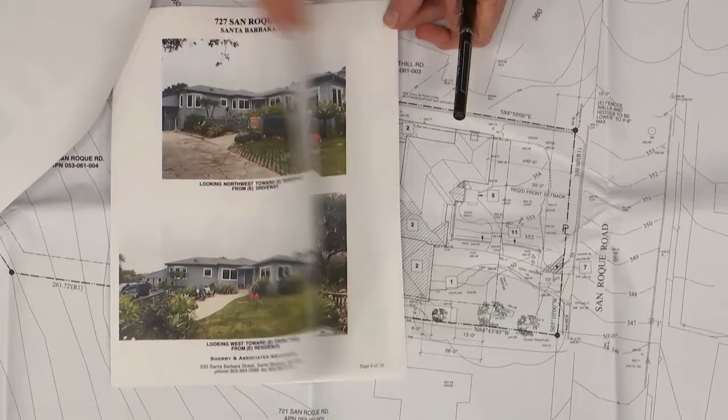This is the front of the house from the driveway. This is looking west toward the front yard, a close up of the front of the house. This is the backyard, from the backyard looking back toward the house. And then looking toward the existing garage from the backyard.

This is San Roque, and then this right here is the existing garage that we are removing and relocating. I'll show you that in a second.

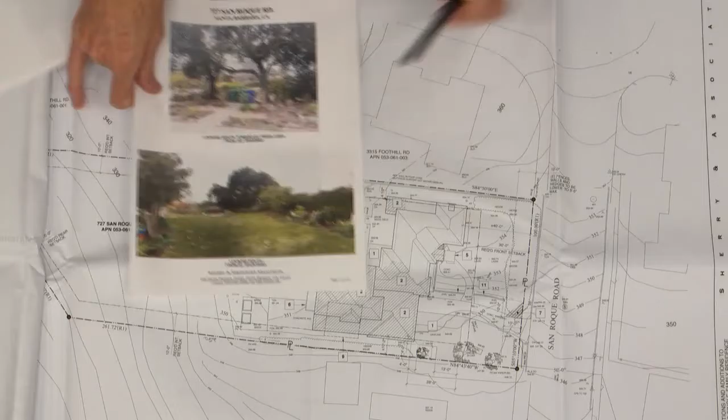More photos of the front, or looking toward the garage from the rear deck. This is looking south toward the trash area from the driveway, and this is from the existing backyard looking south.

And the property backs up to the creek. What creek? San Roque Creek. Is it San Roque Creek? I was wondering what the name of it was. Yeah, it's San Roque Creek, near Stevens Park. Carport, you kind of get the idea of what's going on here.

That's looking from the driveway toward the street, and this is the adjacent property from the driveway looking on the other side of the street.

So what the Wilsons need is more room for their family. They're a family, but it's growing, so they need more space.

And right now, the house outline does this. There is an existing two-car garage here, which is inaccessible. It used to be accessed this way, but it was always really close to the house. We want to relocate the garage entirely, demo the old garage, which is partly in the side yard setback, so we'd be eliminating that nonconformity and building a two-car garage that faces the street.

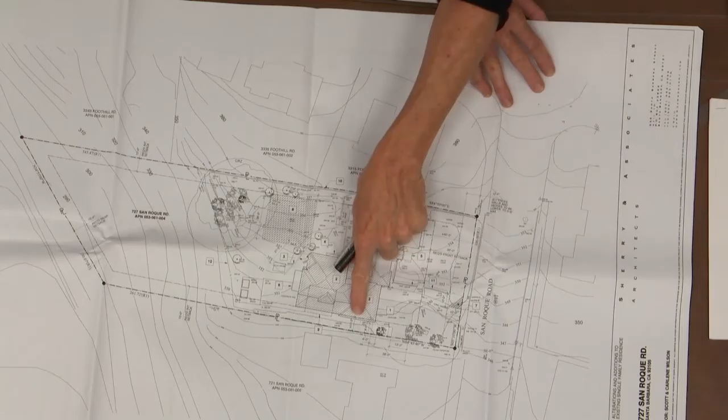Then adding on a lower level. This would be a split level two-story back here, because the lower level would be lower than this main level, and the upper level would be higher than this main level, so it's a three-level house. But the second story, which is half a story above the main story, is set back behind this one-story garage.

I'll show you. Here's the existing residence, here's the new two-car garage. We need to maintain access to the lower level. It's a basement that has the water heater down in this area, so we had to maintain the stairs, and we wanted to have access to the garage from the front of the house.

This would be all in conformance, interior and setback wise. And then this would be the lower level. This whole area here is dropped, same as the garage, from the main level by a half a flight. And then the upper level goes up a half a flight.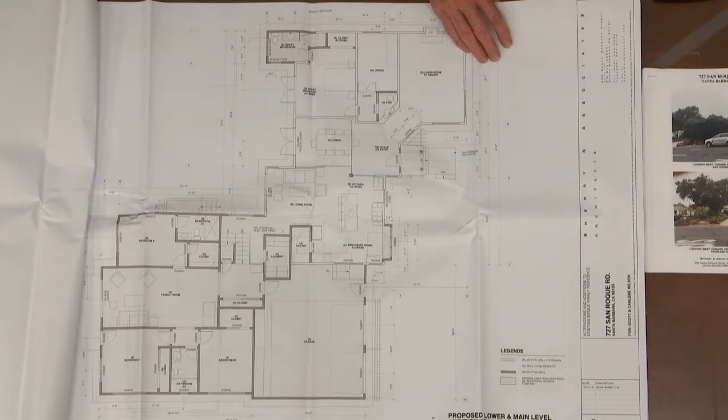By the way, that nonconformity is along this setback, so we need a modification because we're just slightly in the north setback along this property line, and because this is an as-built addition, we want to get this little area permitted. It's within a foot, maybe 6 inches. We're just attaching to something somebody already did, and now we want to get it permitted.

The upper level is here, the master bedroom suite. It sits over the garage on the lower level. And there's some ocean views from the upper level.

Right now the front door has a little lowered gable that tucks in underneath the existing eave, and we'd like to move the entryway, because as you walk in right now, you walk right into this wall. By relocating the entryway, we have a proper entry vestibule into the house, and then the living room is off to the side in its own little element.

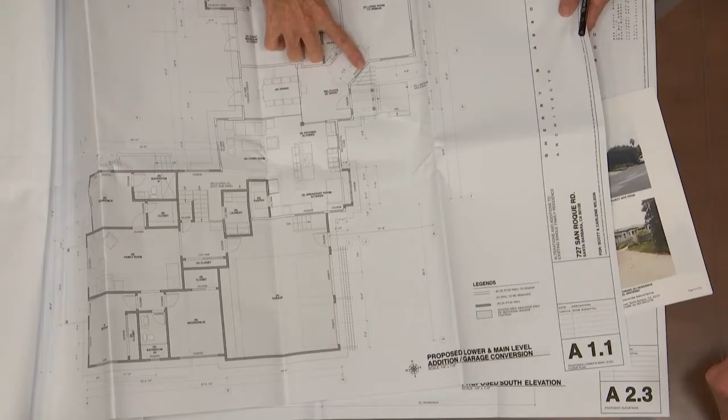So the front door's being relocated, the door is right here right now, and that would become a window. We want to celebrate the entryway with a little trellis and a gable roof. New 2-car garage.

This is the master suite with a little sitting room, not with the raised plate, so it kind of looks like a little tower, but not really because it doesn't have a raised plate. You slightly see that from the street, but primarily the upper level is diminutive because it's set back so far from the street.

The house right now has some charm, and there's some funky things with these little roofs, and the idea is just to really make it better. We want to do the house better.

So this is the south elevation showing the master suite and the lower level bedrooms. You're adding over 2,000 square feet to the house.

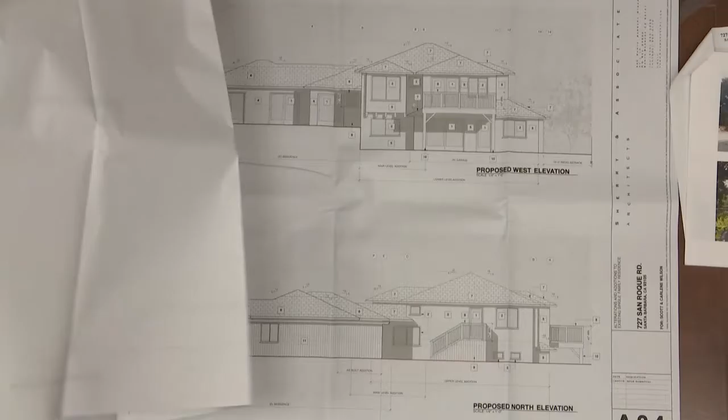And then this is kind of the kids' realm, the bedrooms on the lower level, walking out onto the yard toward the creek. It's all back on this elevation here.

So it's coming down the stairs. These are the kids' bedrooms, and then their family room area there. And that's it. Okay, thank you.

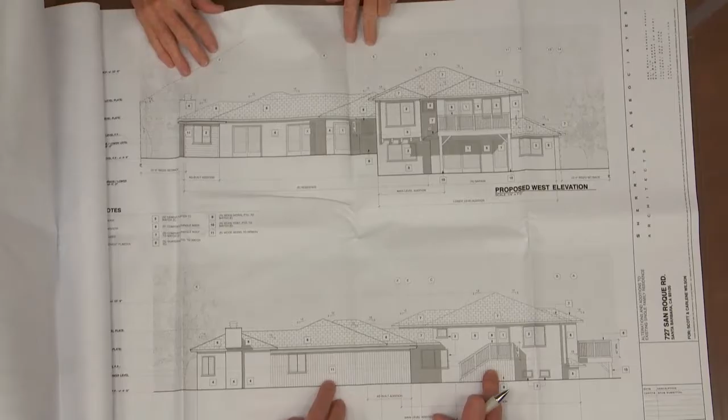Correct. Okay, and then on your elevation drawings, you're showing some indication of siding. My memory says this is kind of a stucco house now. There's some materials shown here, here, and here that look different. What are those, or what are you thinking? We wanted to mix it up a little bit, so this is vertical, horizontal, so that would only occur in these two places? Let's see, this is hard to see, this is the north elevation.

The north elevation, the one facing towards Foothill. Right, because it's the fireplaces on that's the existing house right there. This is the as-built addition, this is existing. So is that just indicating as-built, or is that a material that's actually there?

Wood existing on the side of the house there? I think it is, isn't it? Yeah, that's okay, so that's existing. This is just new, because it was new, just a wood element.

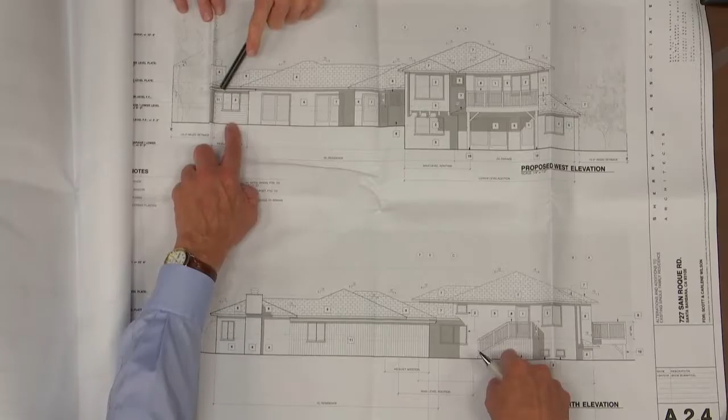Then this is that little thing that got added. It's existing, and that's existing. That's as-built, that clarifies for me. And then, on the south elevation, I think that's it.

Those are the first floor windows facing south, and these all are the new windows. Yeah, this is all new, okay. And then on this elevation, looking that way, there's a window here that's looking onto the slope of this roof.

I'm gonna be curious to see how you get water out of here, because you got water going. A cricket should show up on the roof plan. We have to have that window because the kitchen needs it. I understand, I'm just curious about how you're gonna do that.

And then the other last question I had is on the existing fireplace. Gone in yet, but yeah. Go ahead. The existing fireplace, I was trying to see, it doesn't appear to meet the code, in terms of 10 feet, 10 and 2? No, it does not.

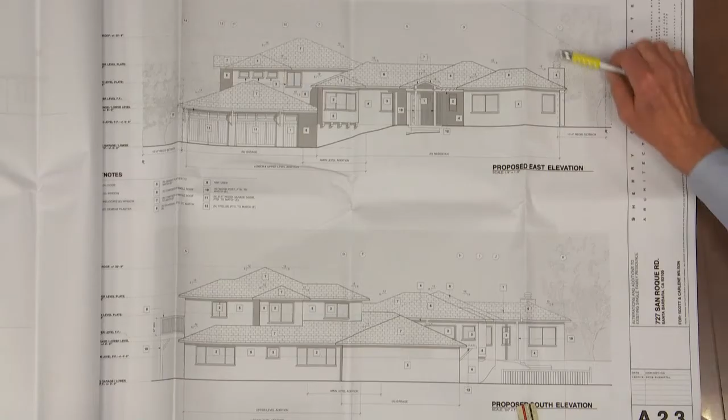So I wonder if they're gonna make you touch that. You have to raise this because you're only about 8 feet across from here, so you may have to do something with the fireplace. In that quarter-inch scale, about 4 or 5 feet across there. It has to come up at least 2 more feet.

Okay, are there other questions? And in fact, you've showed it higher here. Well, it is a little bit, but it's not quite right yet. Okay, if no more questions, then let's go to comments. See, this one you have peak below, or this one's above, and this one's below here.

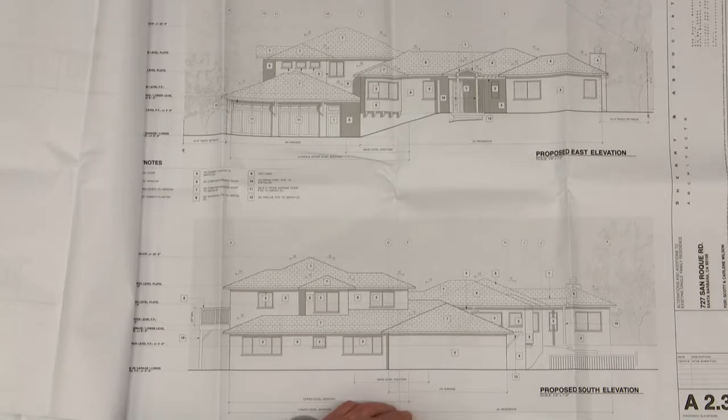But I am a little concerned about the size of the windows on this side, only up on the second floor. I think this thing is down low enough, and given what's out there and hedges and landscaping between the 2 properties, even though the house with windows is over here on the lower property, I don't see a big concern here, but I think there might be a concern up here. So maybe just look at that, I forgot what's up there. This is back. Yeah, it's back, but let's see, go forward here. Sometimes just a little tweak can make all the difference.

And it's stepped back from here, and this property is down here, significantly lower. There's a garage right there, and another garage here. So 7 or 8 feet, that may not be a big issue, but something to look at.

But if they're in their yard, will they be able to see them in their windows? I don't know, probably not. We don't have that information. And if they are, they'd have to be standing at the windows. They're going to be walking to and from the bedroom to the bathroom in the back part of the house, not right in front of any of these windows.

These are the windows with the ocean view. I guess if I wanted to finish my comment, maybe a site section in that one little area going across, showing the lot next door, would help us understand. Would be good, would be helpful.

Okay, other comments? You say you have an ocean view, do you have an island view from there? Yeah, they're looking out at Santa Rosa.

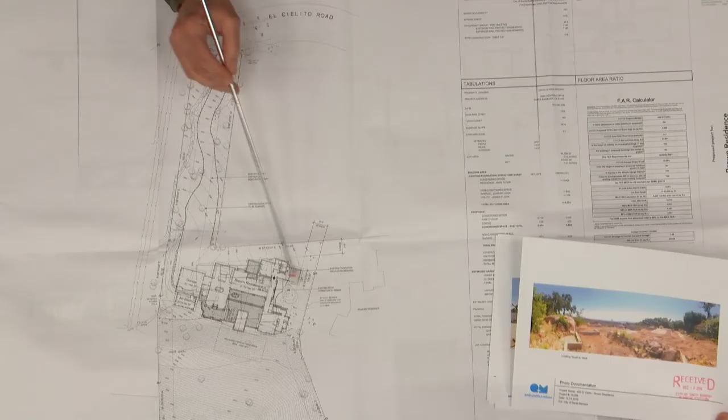There are a couple of features I should note. In this driveway, there's a huge eucalyptus tree that you can see here in this photo. We're proposing to take that down. And then there's a big rock in this area that you see there in the photo that the existing house was kind of built around. So the tree's going away, but the rock we plan to keep and incorporate into the design of the new house.

The house, in general terms, is kind of a U-shaped courtyard house with the garage at the end of the driveway, and then we'll work out a walkway path to this little low wall courtyard into the entryway here. There's a covered loggia off the back of the main hallway, and then there's another covered loggia off the living room, where it takes advantage of the best views from the site, up the valley at sunsets, and across the valley during the day.

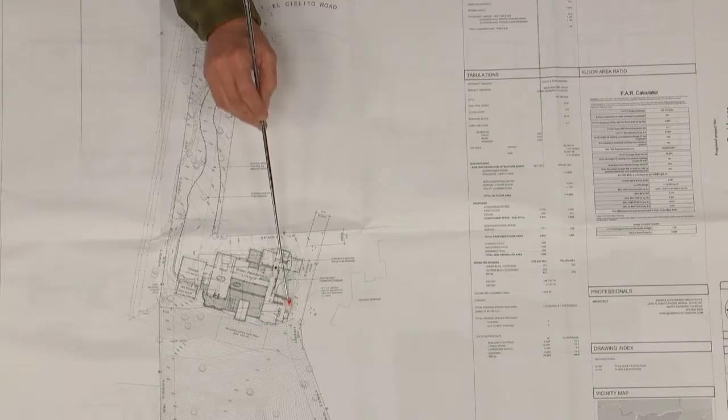This portion of the house, essentially the bedroom wing, will be built around this big stone rock that you see there. The driveway intends to stay essentially as it is for the most part. We will have to do some grading in this area and deal with guest parking and access into the entryway walk and so forth. But you can see we're pushed up against the setbacks on these three sides: the garage corner, this front, and here as well.

The house is intended to be essentially a single story. It does have a couple of steps as the site slopes downward in this direction. There's a step here up to this bedroom wing, which is the highest part of the site. This is all the same level, and then there's a couple of steps through the mudroom and laundry room into the garage, so it kind of naturally steps down. And then this art studio is actually about 3 feet down from this level, because that's where the site begins to fall off.

Traditional Spanish colonial style house, very simple. Clay tile roofs, smooth Santa Barbara plaster. We're probably going to do an aluminum clad window.

And the patio finishes, we'll get into that as we explore that with the landscape architect. We haven't gone there yet, but we're thinking about probably a brick traditional type patio or pavers on the exterior. This pool is just a simple cooling off pool, not very big at all.

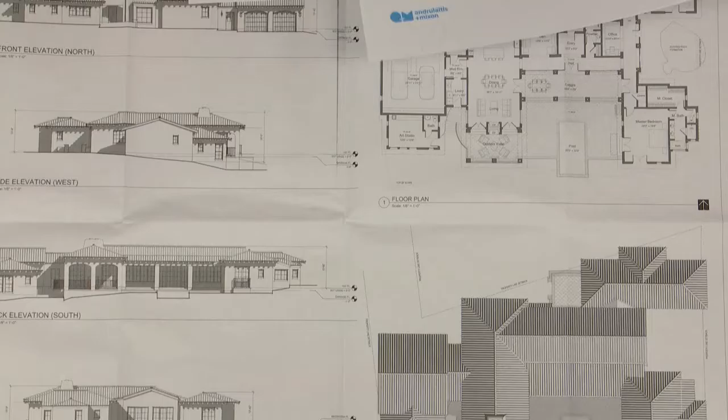So this is a view that's not really even seen, because if you look at the site plan, this is obviously at the front of the house, but the property in front of us comes to a corner at this point, and there's hedges and trees, so you don't really ever get this full advantage. If you're here, you'll get kind of partial advantage of that view, but you can see the two-car garage. This would be the mudroom door in kind of the rear entrance, kitchen, living room space, TV, den off of the entryway, and then this is the bedroom wing.

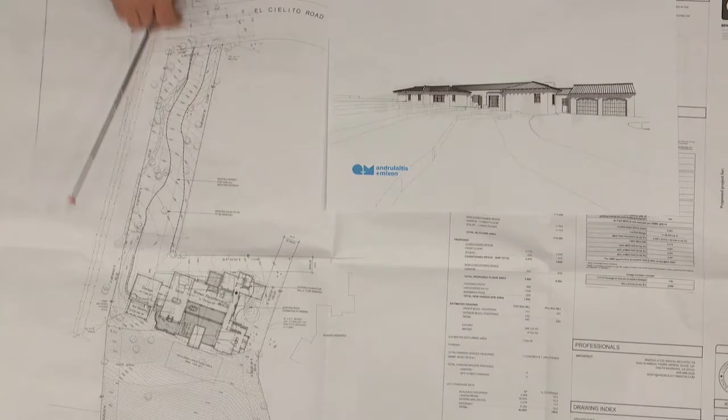You can kind of see from these images that we haven't shown any retaining walls or anything, so this is literally the house set into the site at this point, but you can see how this begins to bury into this portion of the site, probably about 3 feet plus or minus. So we're going to have to do some retaining near the entryway, probably around this side of the house, once we develop that a little further.

This is a view from the back side. This is the master bedroom wing, the bathrooms and closets there, the loggia off of the main body of the house, and this is the loggia off at the end of the living room, and then you can see the art studio in the back. And that's the pool. As you can see, we're right at kind of the crest of the hill.

And this is kind of from the other side. Art studio is here, the loggia, and then the master bedroom wing on that side.

So that's about it. We're at 80% of our FARs. And we have met with the fire department regarding the driveways and so forth, and they are fine with that. We don't need to change anything with the driveway. They like that we're taking out that tree for them. But other than that, they're happy with the project.

What's the average plate height of your house? We have, I think the largest plate through here is like 10 feet. Through the bedrooms, I believe it's 9. I'll show them right here. I guess we didn't—that's fine. Yeah, so that's the main living area, that's the largest. Okay, other questions?